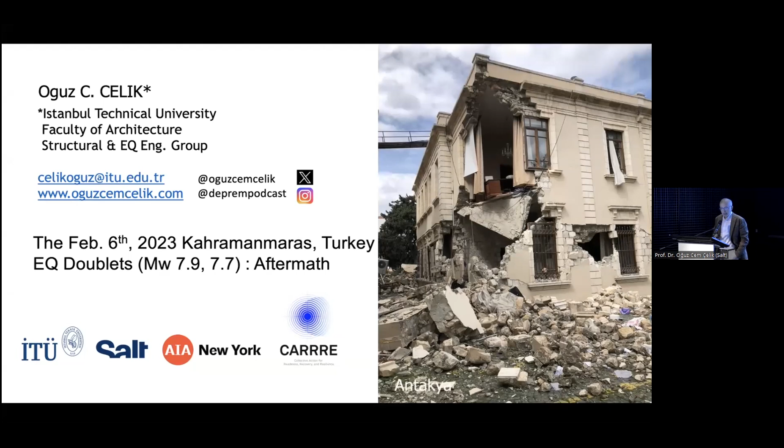I will be starting with the damage assessment, talking about what went wrong really, and how we are going to fix it. I would like to thank all the organizers, and especially for inviting me to deliver this talk. So here we start with Antakya. I'm going to talk a little bit about building behavior, especially on soft soil. This is an area where we experienced a lot of liquefaction failures. I will be showing you some images from the area. I spent a lot of time in that area after February.

We will be starting with the seismic hazard map of the European countries, including Turkey, and the area affected by these earthquakes in the Turkish part, as you see here with the blue circle. So we see that we expect quite large accelerations around Turkey. As you see here, we expect accelerations larger than 0.5 g in the area, together with some other southern European countries, as well as Italy and so forth. There's also a very serious region in Romania, for example in the Vrancea area. That area is very critical too.

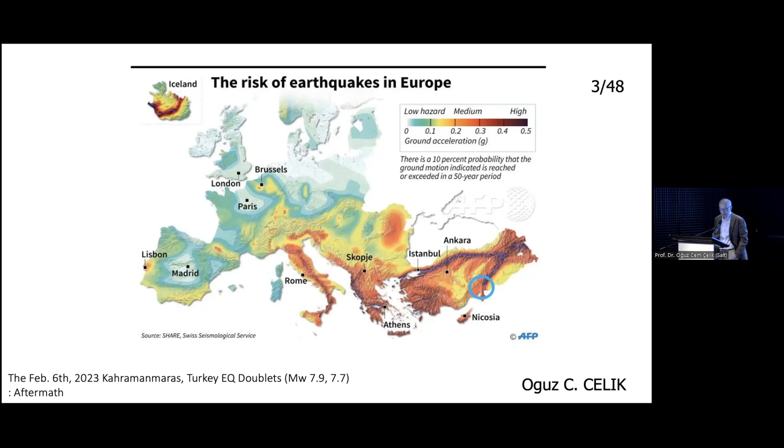If we get closer to the Turkey map, you see that we currently experienced an earthquake of about a 500 years return period. This is called a rare earthquake, probably a very rare earthquake. If you go back to the previous earthquakes in the past, you will see that similar earthquakes happened in the area, quite similar to the magnitudes shown here. So the region is quite problematic in terms of seismic hazard.

In the past, in 2020, this map also shows you the seismic hazard. The current seismic hazard map shows the earthquake in the Izmir area. That earthquake actually happened on Samos Island of Greece, but affected Izmir city and resulted in about 20 building collapses in the city and killed many people there. And the people here in Istanbul, for example, are expecting the next big one in the near future. Some seismologists say that the big one is overdue, or some say we have some 20 or 30 years more, but the magnitude is quite large. Our building stock in this area is too weak to withstand such a big earthquake, measuring 7.3 or 7.5.

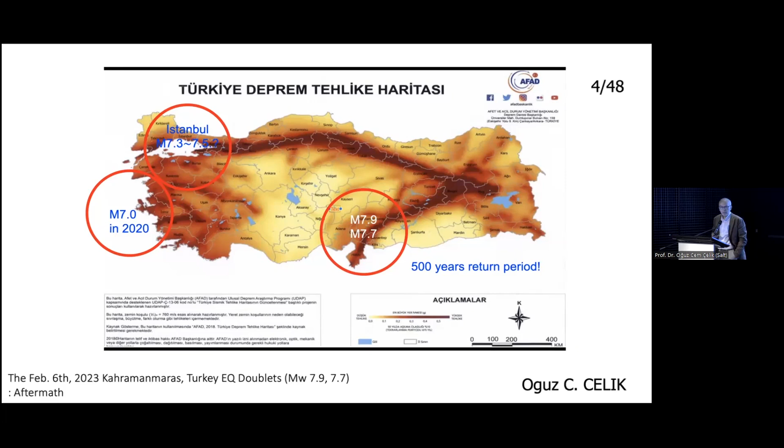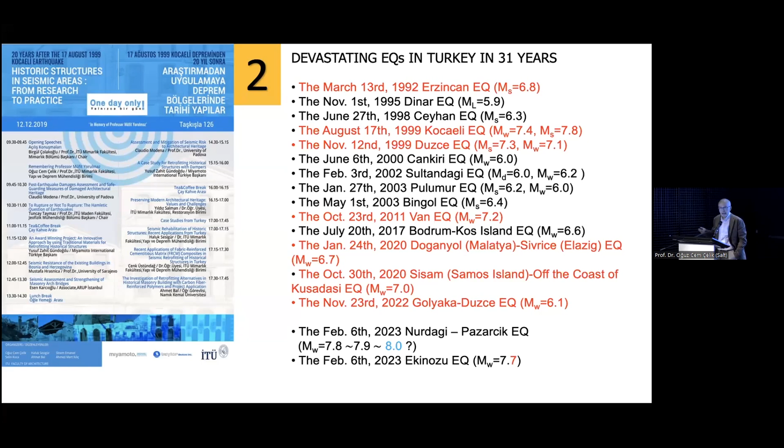Coming back to the Kahramanmaraş area, this is a list of devastating earthquakes in Turkey in the last 31 years. I made a lot of reconnaissance investigations in Turkey and abroad, especially after earthquakes in Italy. I'm leading a team at ITU, my university, to organize one-day events focusing on several topics of earthquake engineering, before earthquakes, not after earthquakes. It is quite usual to talk about earthquakes after the earthquake, but the aim is to prepare people and explain the problems. We are also talking about historic structures in seismic areas, as we had problems in Hatay or Antakya, especially for heritage buildings.

So the latest earthquakes had incredible, huge magnitudes. Seismologists say that they calculate the magnitude 7.8, 7.9. There are some differences on that. But sometimes if you take into account some other parameters, they say, okay, it's 8.0 magnitude. This is huge. The older, or I would say substandard, building stock or heritage buildings were quite weak to withstand such a big earthquake.

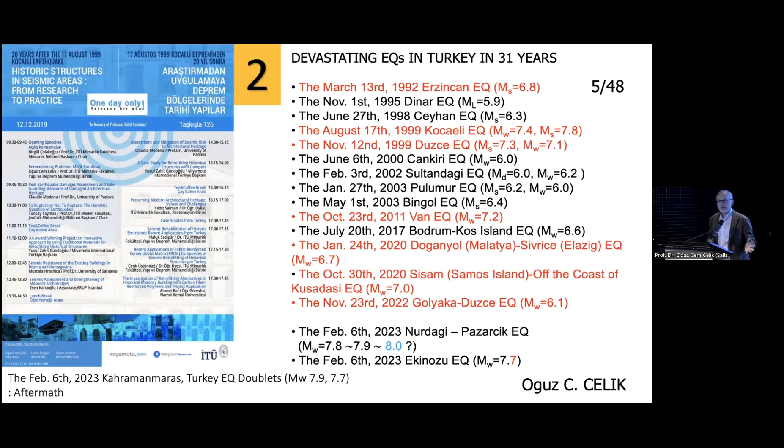And unfortunately, on the same day, we had the second big earthquake, 7.7. Again, so during the first earthquake, the buildings were weakened significantly. Some collapsed, of course, but the weakened ones, unfortunately, collapsed in the second one.

So this is a very simple map showing you some acceleration stations in the region. We picked some very significant ones, and we obtained the acceleration displacement response spectra. Okay, I understand that most of the audience is architects, but these are some engineering parameters, and we use them to evaluate the damage to performance of buildings during earthquakes. Very helpful also in the performance-based design of the buildings in the area.

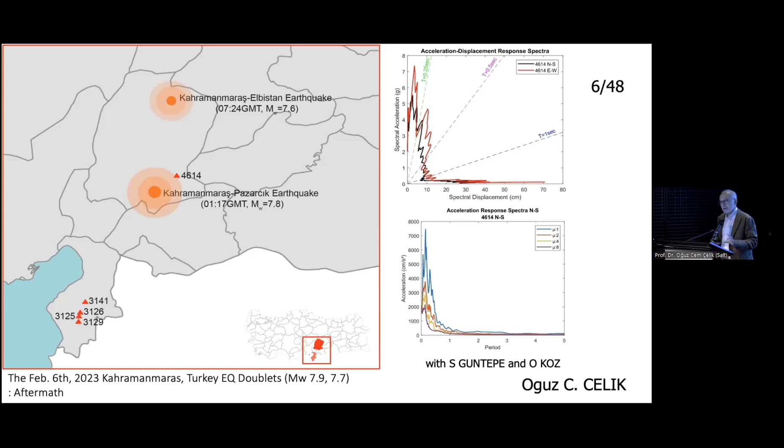Also, we looked at the acceleration response spectra of some from elastic to inelastic or damaging buildings, and we saw that finally the buildings' type of damage and collapses could be explained by the acceleration data and the diagrams obtained from this data. So again, this is a list of, I'm not going through all the items because I have very limited time, but there are very serious reasons for this type of huge damage in the area.

For reinforced concrete buildings, for example, starting from poor material properties for both concrete and steel. And there were also many architectural-based structural damages, basically defined as the irregular structural systems in plan layout and elevation. Those are really well defined in the current seismic code of Turkey. By the way, the code is very strong, and I'm in the code writing committee of this code. These irregularities contributed to damage or collapses in the area in the aging problematic building stock, unfortunately.

And there's a very special thing here, pounding or hitting buildings. There were some hammering effects in the buildings in series. We observed this time a lot of damage or collapses from these. So short or captive columns or some others, plus non-ductile structural systems, elements, very flexible concrete buildings, they all contributed to the damage. The last but not the least, of course, the local soil effects played an important role, especially in the area where we observed a lot of damage. So they magnified or amplified the soil effects during the earthquake.

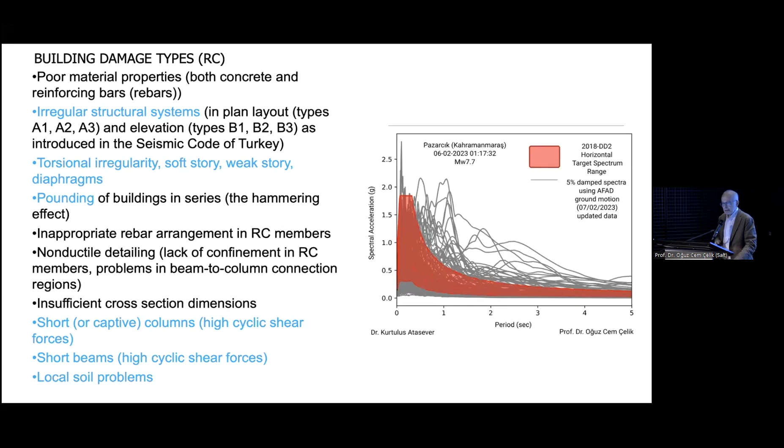This diagram actually shows very important response spectra curves obtained using the acceleration data. We saw that the bottom line here is, this is the first earthquake, these earthquakes resulted in some demands in the structures, almost all kinds of structures, in excess of the current code values. This is a very interesting topic to be discussed probably in the triple B, Building Back Better, phase after the earthquake.

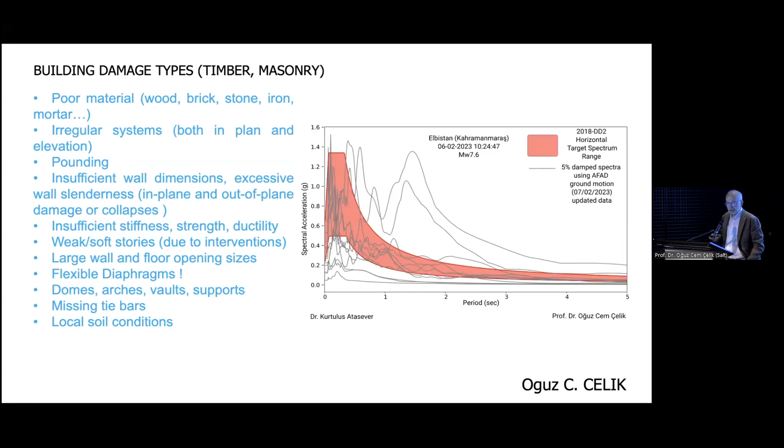Okay, so the similar damage typology could be given especially for timber or masonry structural systems: poor material, irregular systems, again, local soil conditions, and some large wall and floor opening sizes as well. So there are some methods to talk about, some parameters affecting the building performance.

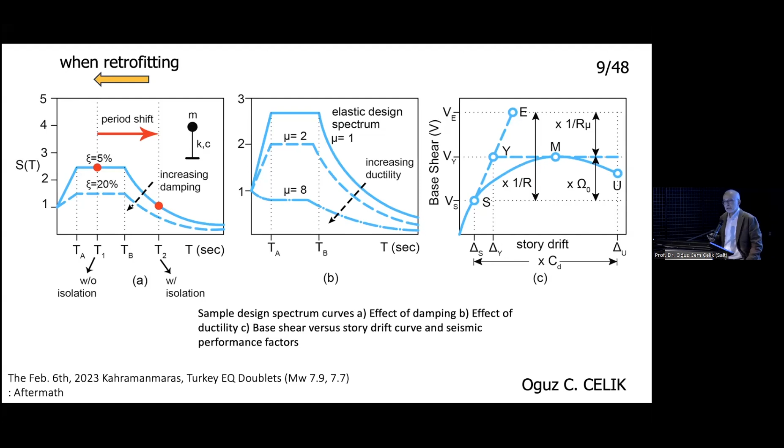One is increasing damping, which is quite useful for structural systems, or elongation of the building period is sometimes useful, especially when you're using an isolation system. But when retrofitting, you add some additional structural elements, and then they are shortening the period and attracting more structural forces in this system. Also, increasing ductility comes with a cost. That cost is actually damage that I will be talking about in a minute. Anyway, so what we know is we know almost everything. We know how to design a structural system earthquake safe, but the problem is the implementation in the construction site.

This is a map. This is a very important map, by the way, taking into account the heavily damaged or collapsed buildings just after the earthquake. Tens of thousands of buildings have been scanned here, and we saw that finally the damaged areas follow the faulting mechanism in the area.

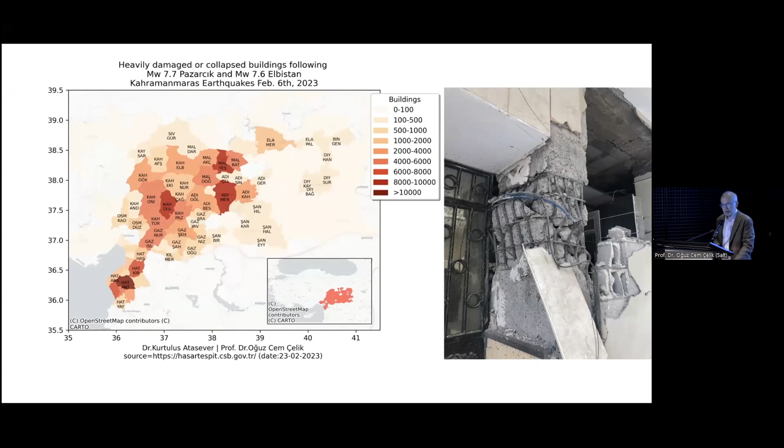Okay, so the very interesting problem is buildings in series. Sometimes if you have separated buildings, this is quite nice, but when they are attached or touching each other, which is not so good, we observe this almost everywhere around here, even in Istanbul. But even if your buildings are separated,

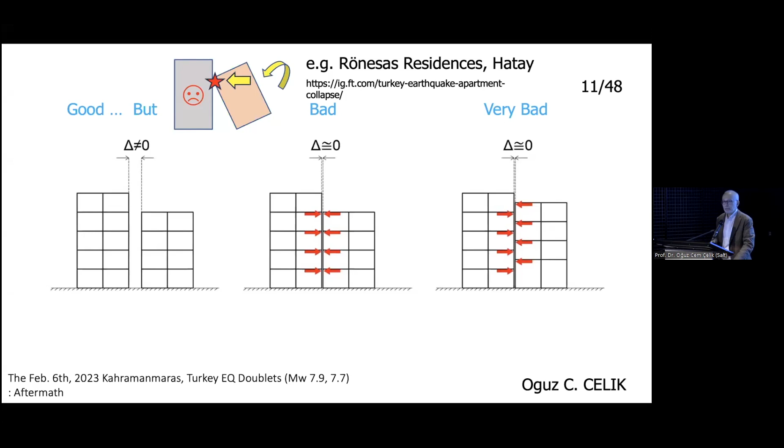if your neighboring building is not a well-designed building, your building may have survived a quake with some minor damage, but if the next building is overturning and hitting your building and damaging it, this is what we need to talk about. Resilience of your building could be fine, but resilience of the city is a problematic thing actually. So it's very critical to have a resilient city, not only your building, I would say.

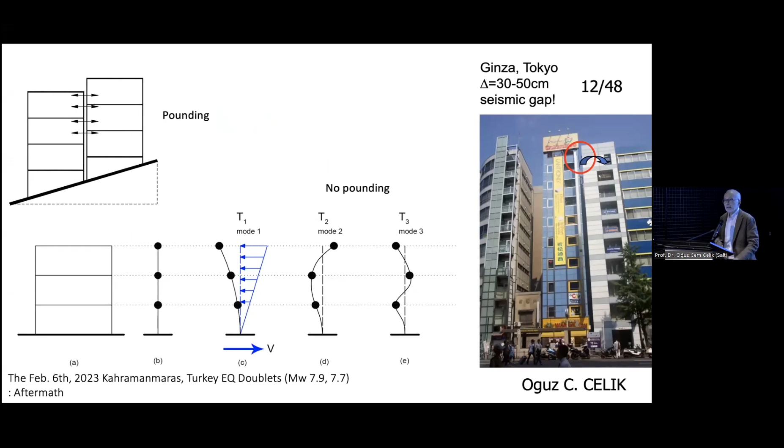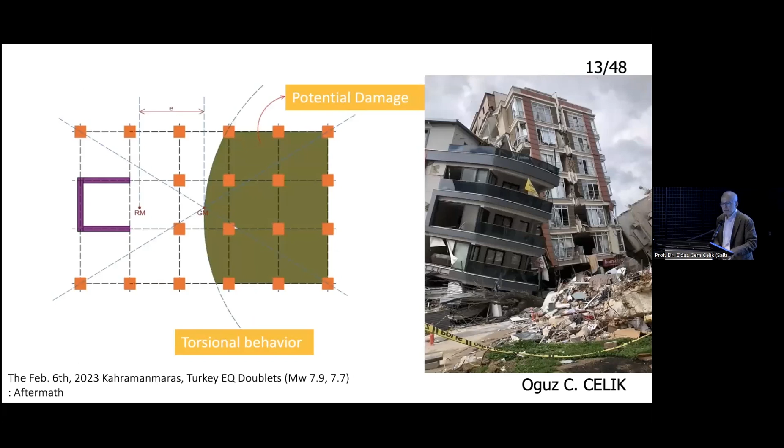Okay, so this pounding effect is very serious, especially when you have two buildings with different story levels, and they are hitting each other and breaking their columns. One of the most important problems is the rotational or twisting effects, or torsional effects, of the buildings, and we saw many buildings like this.

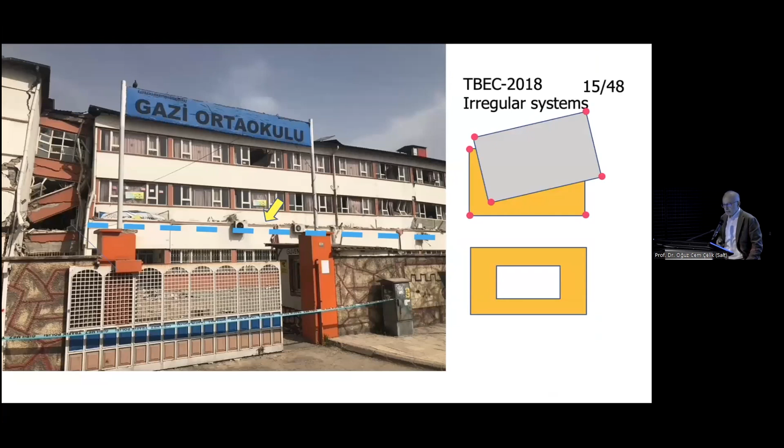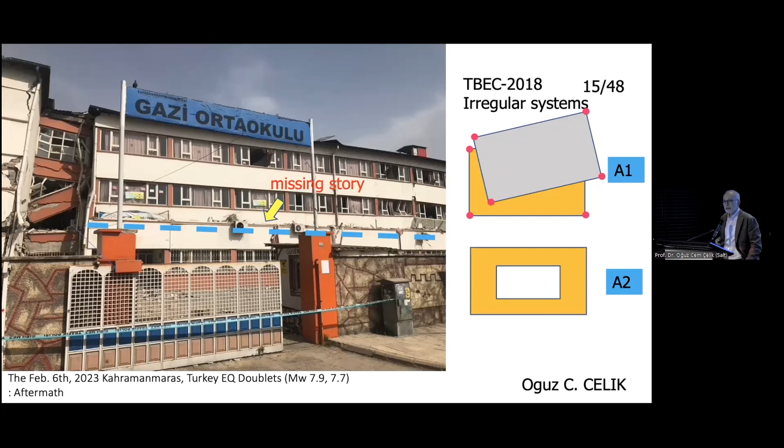On the other hand, there are some other mid-rise to high-rise buildings, up to 15 stories, and they experienced a lot of damage and some collapse. School buildings are very important, and as you see here, there's a missing story. That story failed during the earthquake due to many reasons that I listed before.

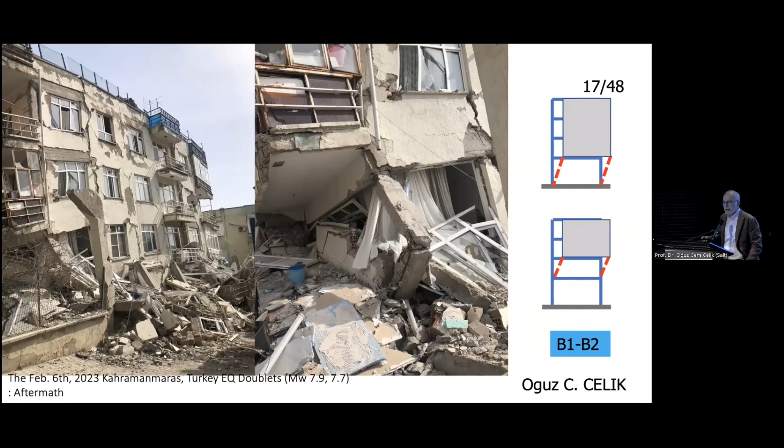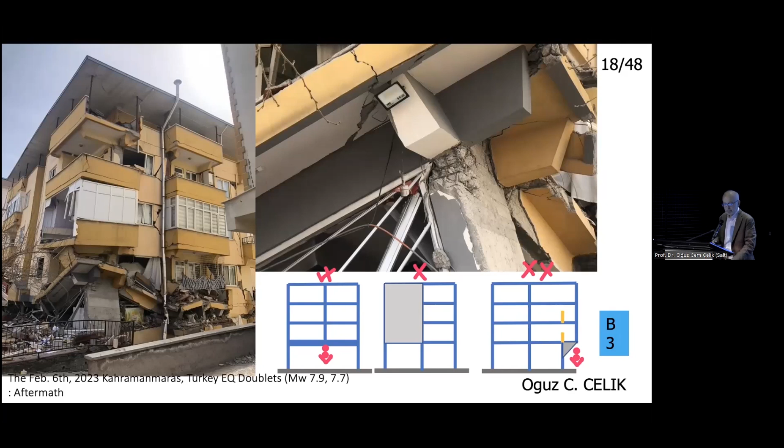Okay, this is a pancake type of structural collapse, and there are some other collapses, basically from soft stories and weak stories. There are many reasons, from irregularities to non-ductile detailing. There are a lot of buildings like this, even in Istanbul. This building typology is more or less the same in every part of Turkey, including Istanbul. So my concern is we have a similar, aging building stock, and they have similar problems. If another strong earthquake happens around here, the damage or collapse scenario would probably be quite similar to that.

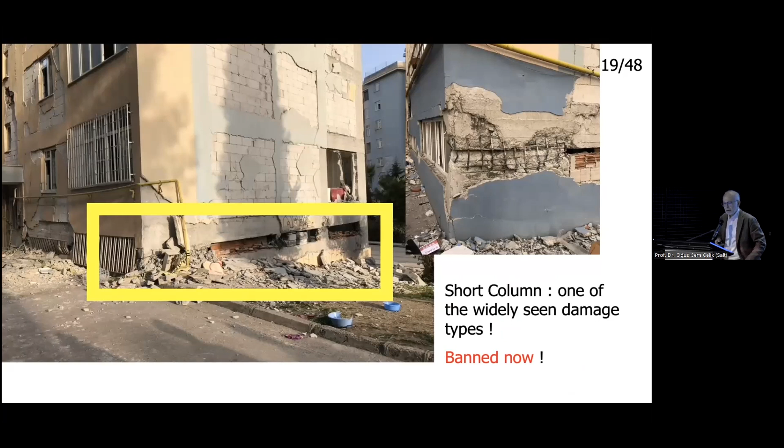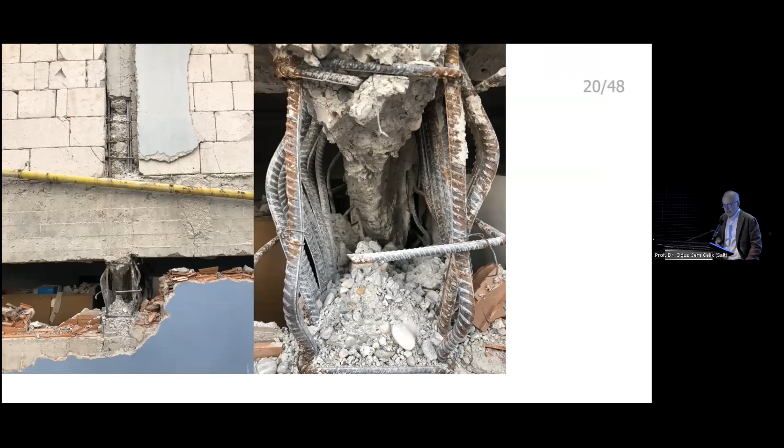This is a very interesting collapse mechanism that we call the short column or captive column. This is an architectural design problem resulting in many big problems, especially in that shortened column under cyclic loads during the earthquake forces. We have bar fractures, spalled concrete, crushed concrete, everything, right? This is another school building collapse that was an addition to a building, but unfortunately that part collapsed very badly.

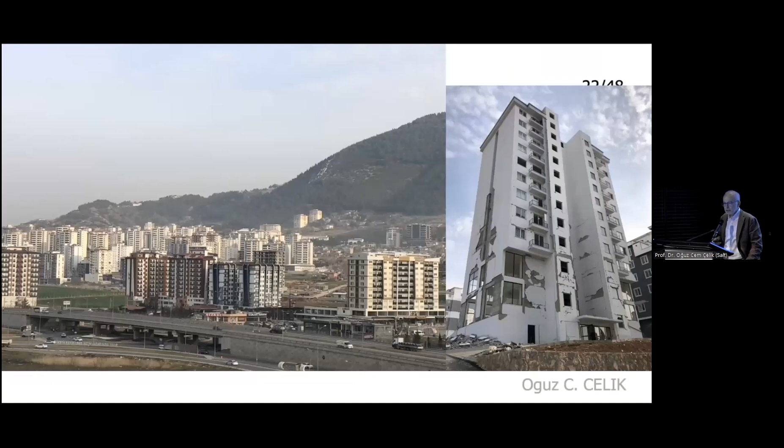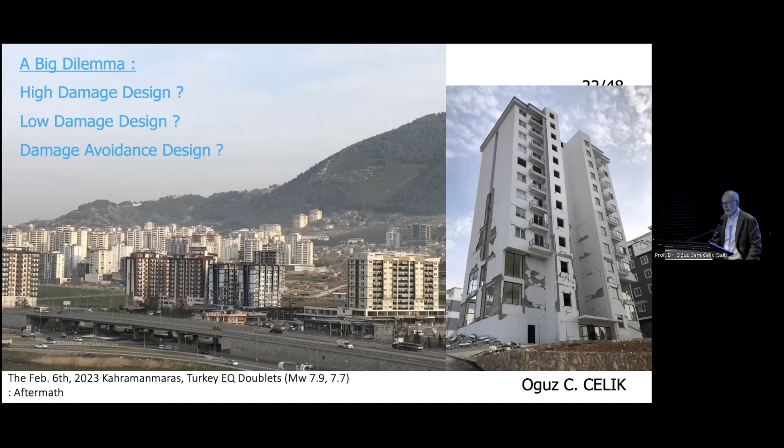So there's a big dilemma actually. In high damage design, we usually follow a level of damage accepted, meaning our buildings should be designed to allow a level of damage. So there is high damage design, low damage design, damage avoidance design, or no damage design. We should be talking in the triple B, building back better, okay? So I'll be wrapping up very shortly.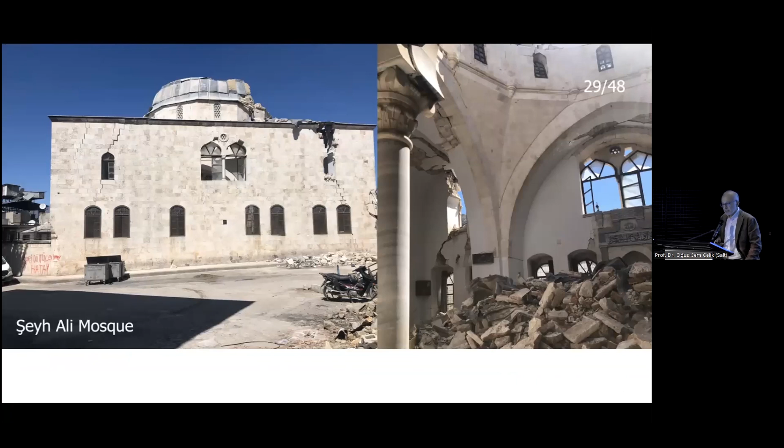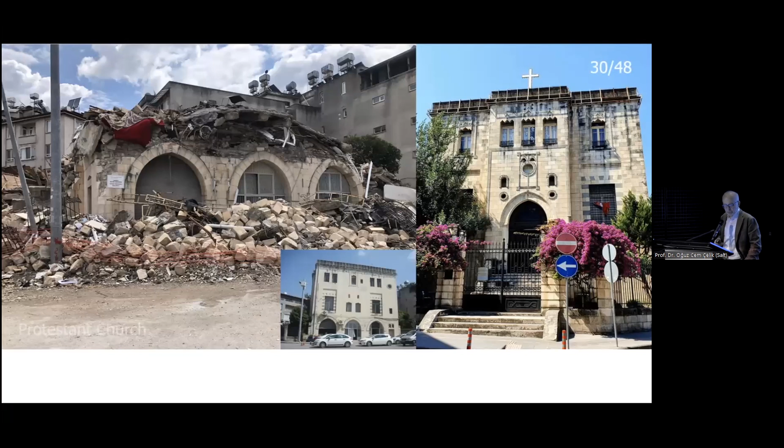Of course, heritage buildings are really critical in the Antakya, Hatay area. They suffered a lot of damage during the earthquake. These are mosque damages from the area, again especially the dome damage, a huge, very heavy dome damaging the building. This is again from Hatay, the Antakya Protestant Church. There are some images here from prior to the earthquake, and the top part of the building collapsed very badly, unfortunately, right?

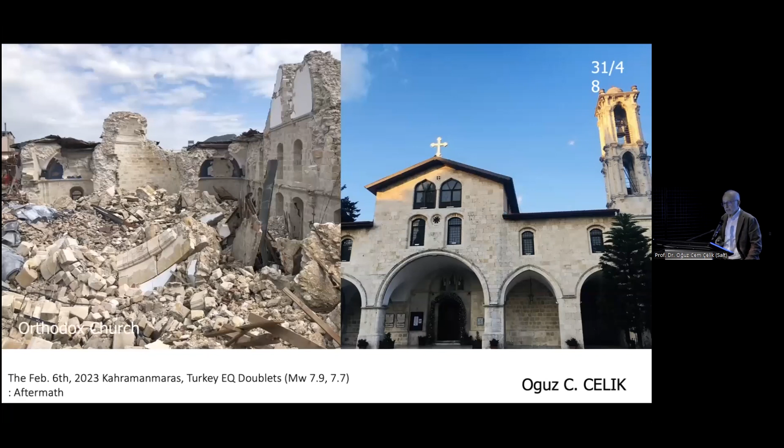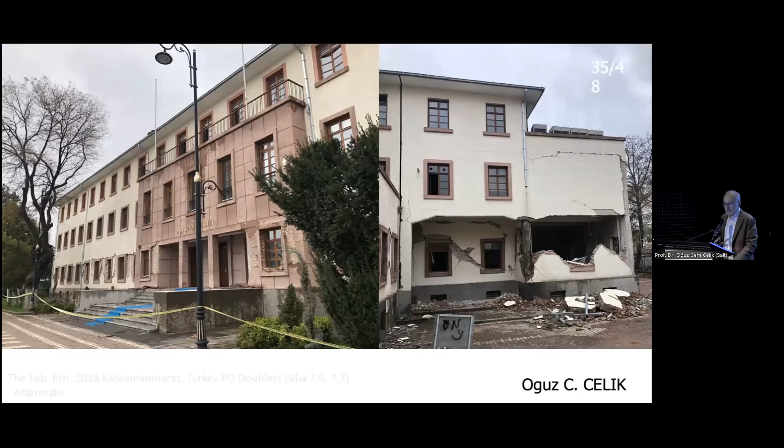damaged in the 2020 earthquake, but collapsed in this earthquake as well. This is a minaret collapse. And this is a governor building in Malatya. This is basically a hybrid system with concrete as well as solid brick system, but there were some partial collapses, but it was okay. I mean, the building was up.

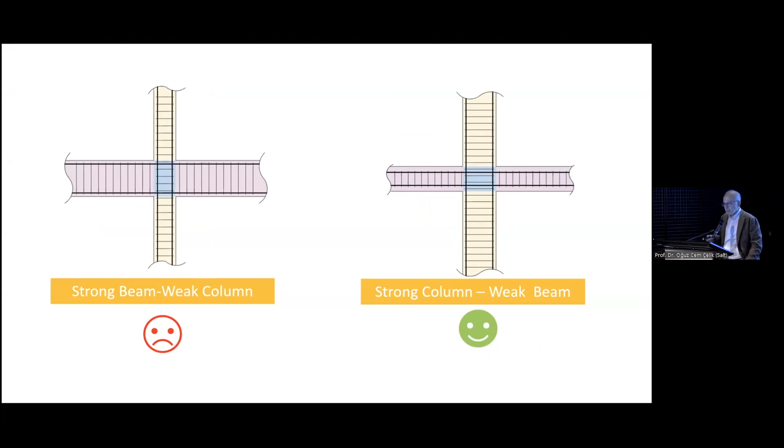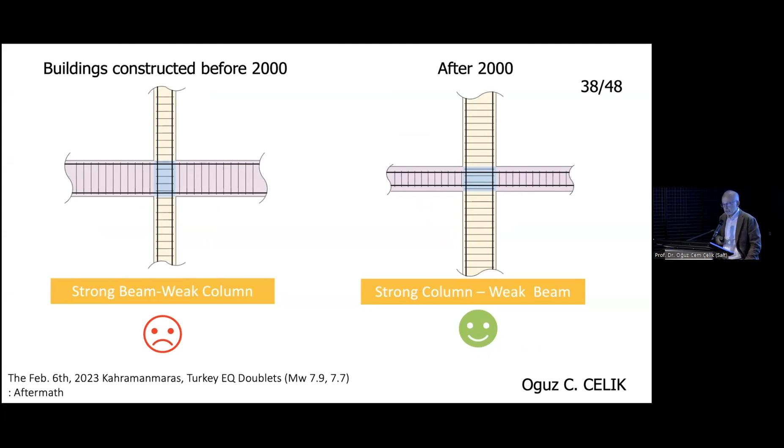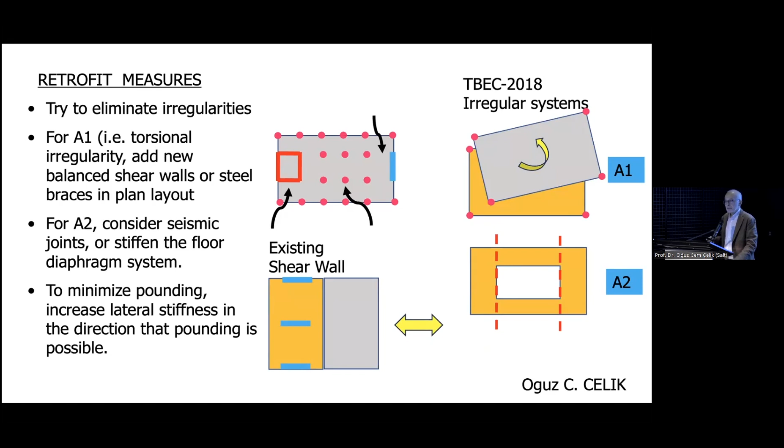So we have quite nice buildings actually in Turkey. And in the retrofit process, you have to eliminate irregularities. This should be your first preference. Okay, I'm not going into details, but you can add some shear walls, you can add some X braces if you want to use steel braces, or for pounding buildings, there's no practical way to minimize pounding, but you should increase the lateral stiffness in those areas, okay?

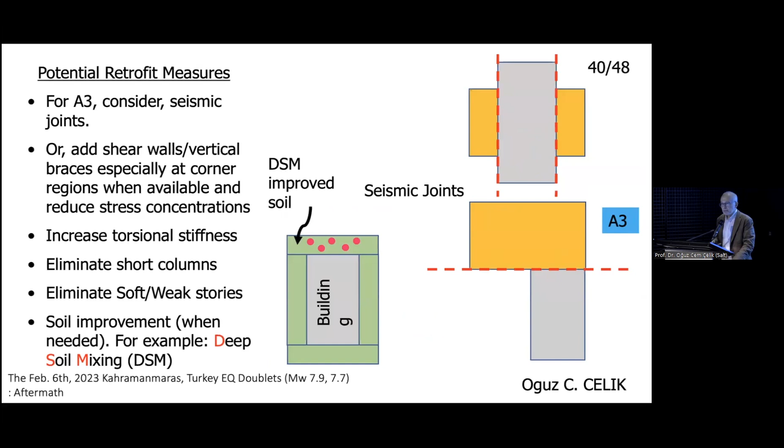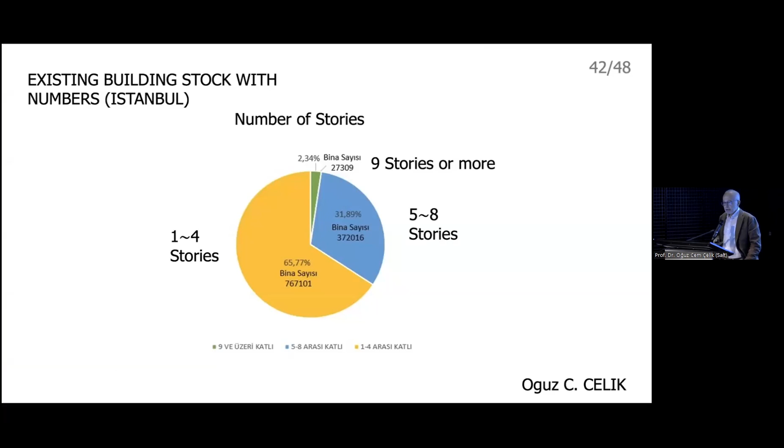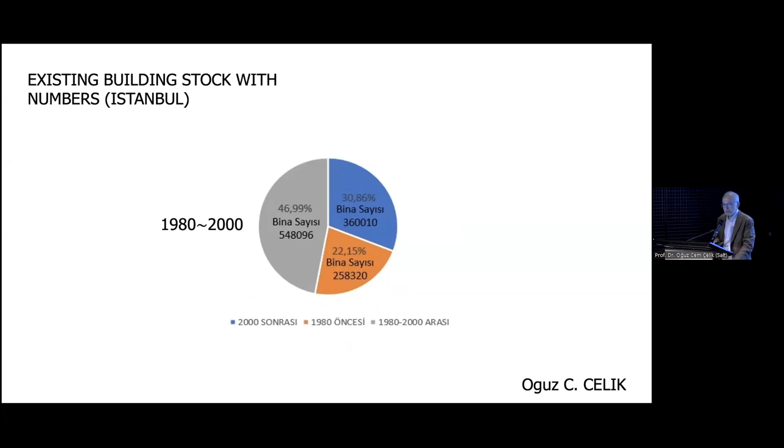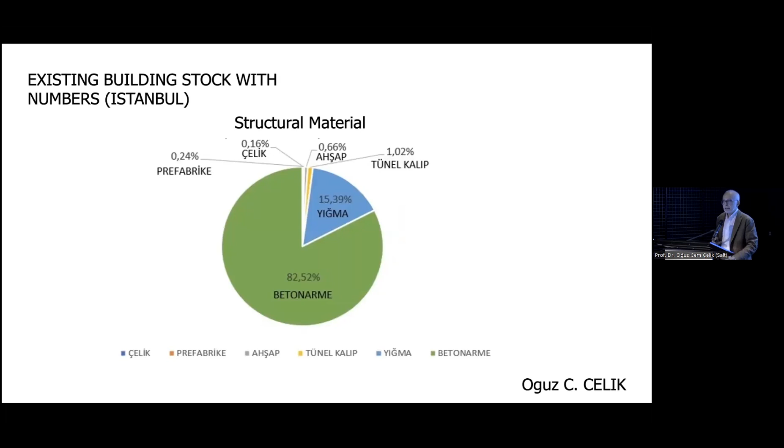So, okay, the number of buildings in Istanbul, these are some numbers. 65% of buildings are with 1 to 4 stories, and almost, let's say, 70% of the buildings are from before 2000, or 1980s to 2000 buildings in Istanbul. Okay, so that means we have a really big problem in Istanbul as well as in other parts of the country. So 82% is reinforced concrete. So these are all, I would say, mostly vulnerable to seismic actions, and some others are also listed here.

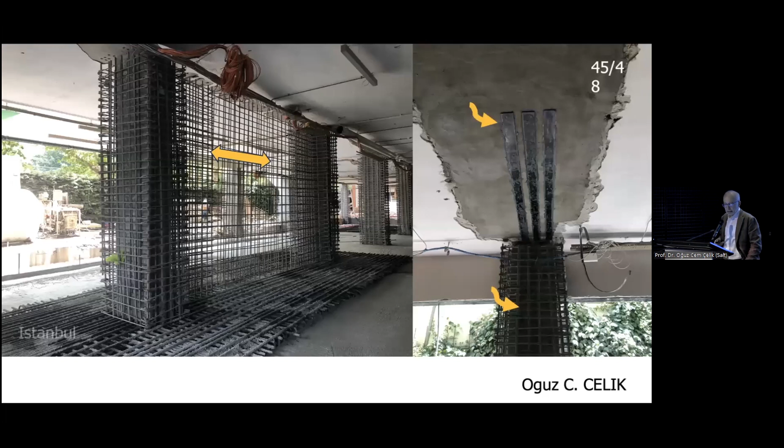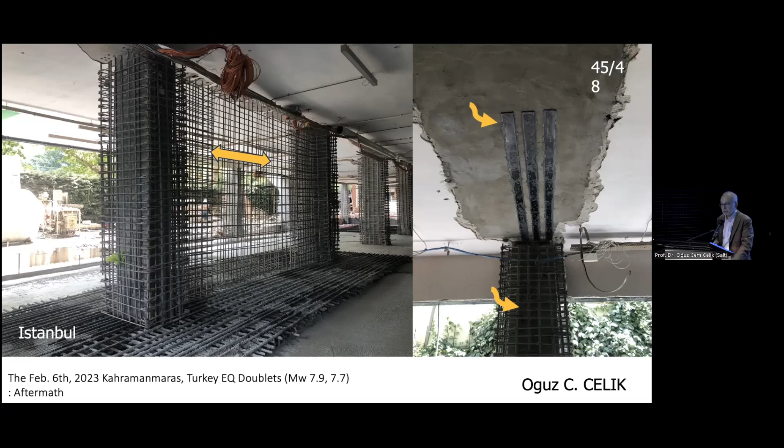So finally, we're finishing Istanbul. There are a lot of retrofit works here undergoing. So the Minister of Education sent a letter to all school building owners that their buildings should be ready for the next big one within months. I mean, so they started to retrofit their buildings with some conventional methods, some advanced methods, whatever they want.

And for the reconstruction, this is the last one, around 600,000 residential units are needed, and around 200,000 units per year is planned. And the idea is to have earthquake-resistant, fast, cost-effective solutions. So, of course, aesthetics is very important. Two, alternative systems for low-rise, mid-rise buildings are sought for the new construction.

1 to 2-story residential buildings are planned. 3 to 4-story residential buildings are planned. There are some RC dual frame or shear wall systems or tunnel form systems, especially. The government wants to encourage this because their performance was really good during the earthquake. And I just would like to attract your attention to other structural systems like steel framed or dual braced or regular systems, or lightweight or cold formed steel systems, or industrialized or modular panel systems. These are very important too.

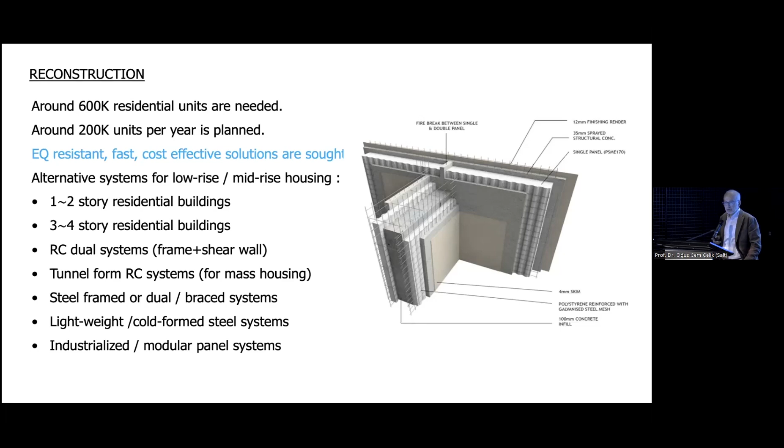Or we should be looking at some robot-aided, accelerated building apartment units. This is very important. Chinese people, they do that very, very quickly. So the number of buildings is huge, and the time is very limited. So I hope we do that triple B in a good way. I'm actually personally optimistic about that. I'm not that much pessimistic, but there are very difficulties to be solved within the next months.

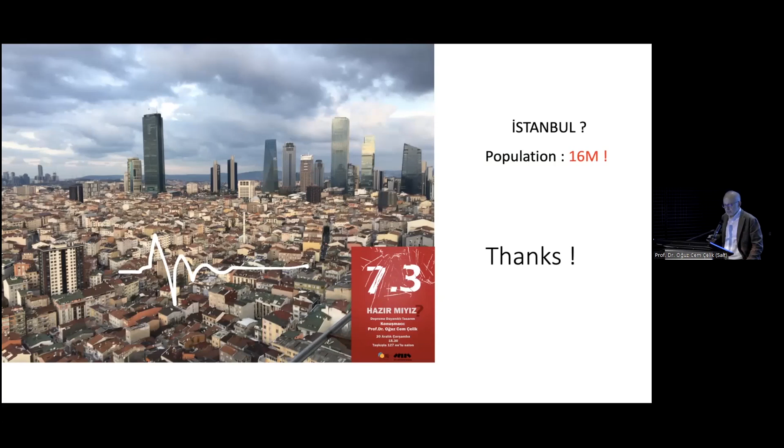Thank you. This is Istanbul, a nice view, probably a nice or bad view, I don't know, but we are expecting the next big one in future. The population is about 16 million.